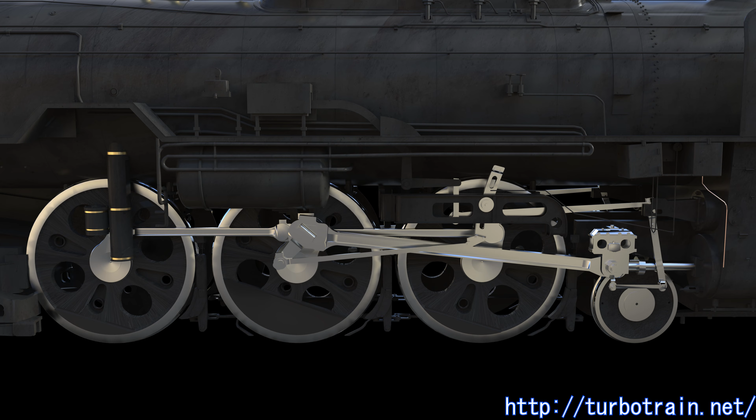The drive system of railway vehicles began with reciprocating steam engines, which could directly drive the wheels through steam pressure. For a long time, this was accompanied by some electric traction systems. Since these methods could drive the wheels directly, either from the power source or through a combination of gears, no transmission was necessary for adjusting speed or tractive effort.

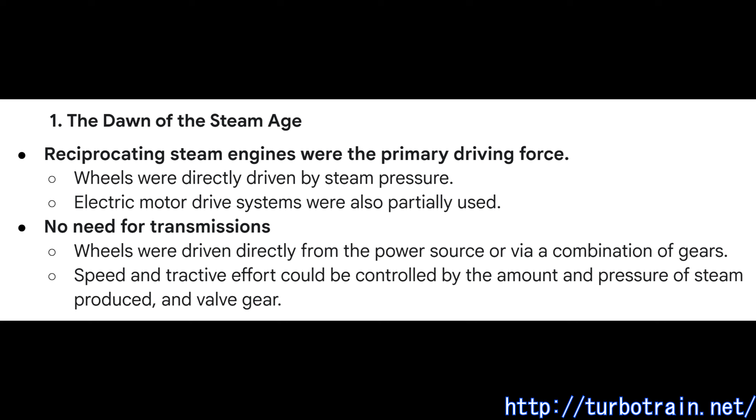However, there was growing demand to address the drawbacks of steam engines, which consumed vast amounts of fuel and water while producing large amounts of smoke. Electric traction did not have this problem, but supplying electricity was complicated.

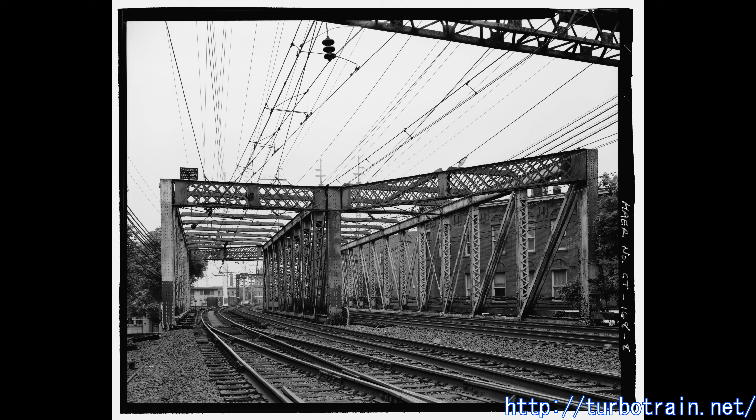This led to the introduction of internal combustion engines. Instead of supplying external steam to a cylinder to move the piston, fuel and air were ignited inside the cylinder, generating pressure to drive the piston.

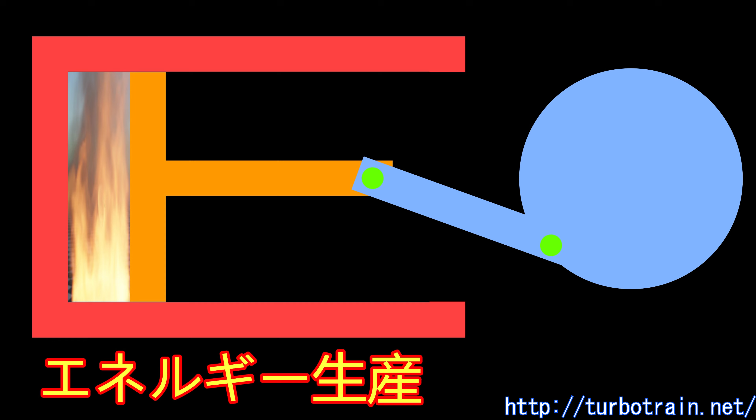Since large steam-generating equipment was no longer required, these engines could be made smaller and lighter, like electric motors, and they spread across land, sea, and air applications. Railways had high expectations for this engine technology, but there was a major problem.

In steam systems, the amount of fuel burned determines the quantity of steam produced, which is regulated by valve mechanisms to control pressure and flow to the cylinders.

At low engine speeds, steam pressure can be maximized, allowing pistons to exert maximum force. As engine speed increases, steam consumption rises, eventually exceeding the capacity of the steam generator, causing pressure to drop gradually. However, since the engine is running faster, the total work done remains the same.

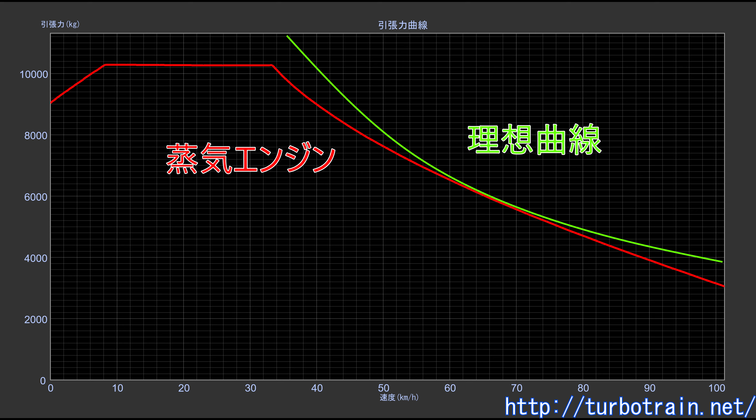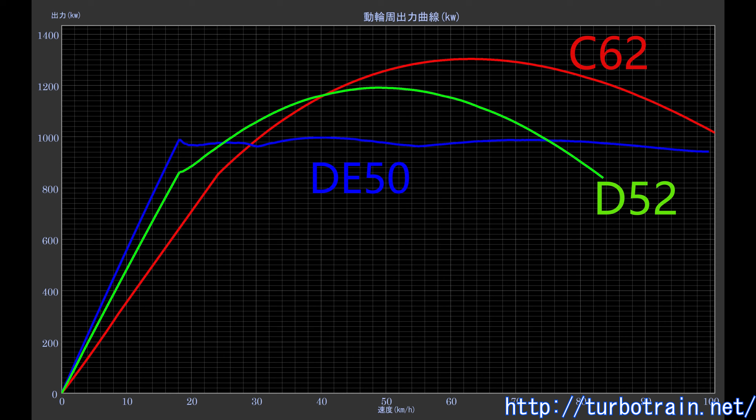Conversely, in reciprocating internal combustion engines, the maximum amount of air and fuel that can be processed inside the cylinder is fixed. The force exerted by each piston stroke is constant per explosion cycle.

Unlike steam engines, increasing fuel and air intake does not create a stronger explosion at lower speeds. Thus, an external system is required to vary torque with speed.

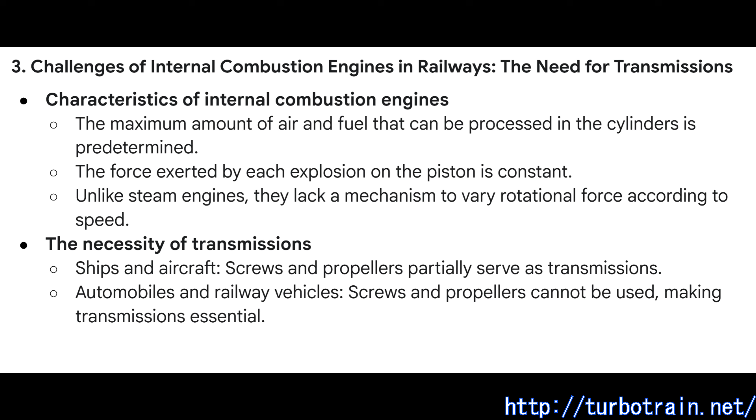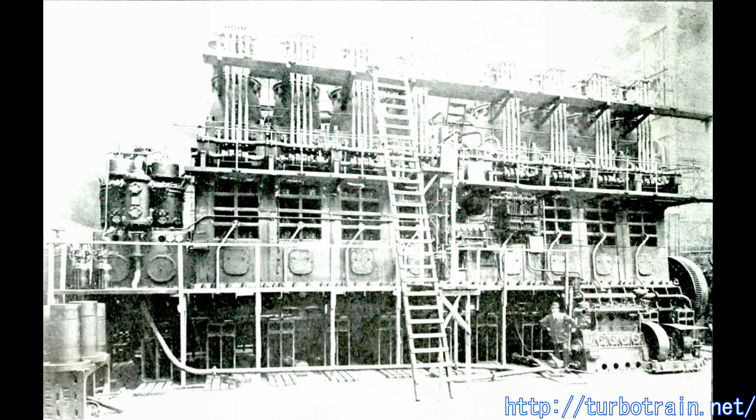In ships and aircraft, propellers or screws perform this function, albeit imperfectly. This enabled early adoption of large, high-output reciprocating engines in these applications.

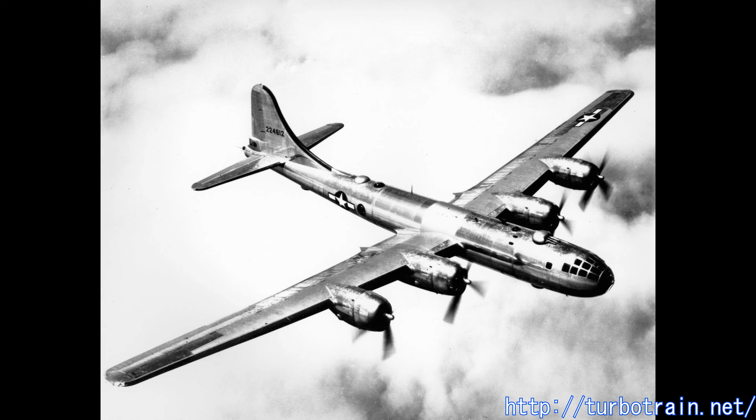However, automobiles and railway vehicles could not use propellers or screws. As explained in another video, they required transmissions to fulfill this role.

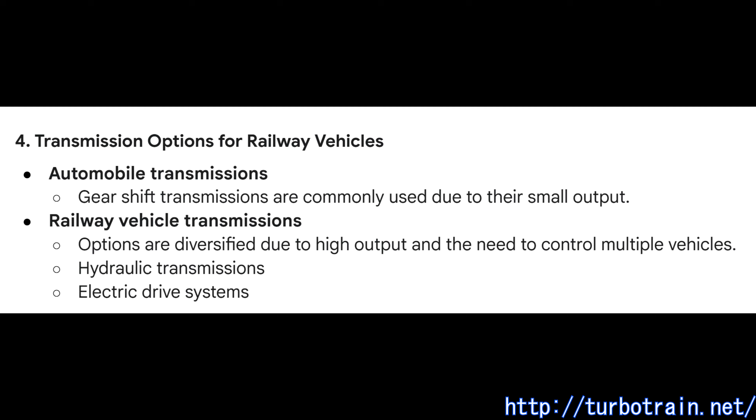Since automobiles have lower power output requirements, gear-shifting transmissions became widespread due to their simpler mechanical strength demands. For railway vehicles, due to their high output and the need to control multiple cars, hydraulic transmissions and electric power conversion systems became the dominant solutions.

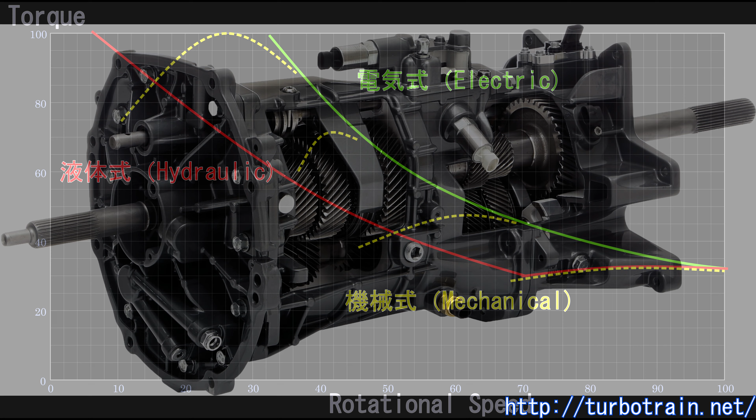Electric traction systems use an engine to drive a generator, which supplies electricity to motors that drive the wheels - a concept akin to an electric transmission. Essentially, it's like mounting an engine-driven generator onto an EMU or electric locomotive.

However, compared to conventional electric trains, this system was heavier, bulkier, and required additional complex components, leading to various challenges. Hydraulic transmission emerged as an alternative solution.

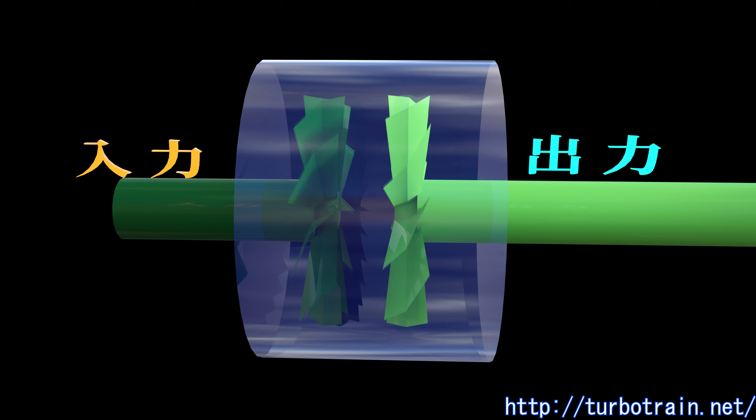It is similar to fluid-based power conversion in aircraft and ships, and hydraulic transmissions are smaller and lighter than DC generators at the time. Since they eliminated the need for traction motors, they were ultimately lighter than electric traction systems.

Additionally, the number of components was drastically reduced, significantly simplifying maintenance compared to electric systems that required complex electrical contacts, DC generators, and DC motors.

Since hydraulic transmissions were smaller, lighter, cheaper, and easier to maintain, they were expected to rapidly gain popularity. However, they suffered from efficiency issues. Performance dropped sharply outside specific speed ranges.

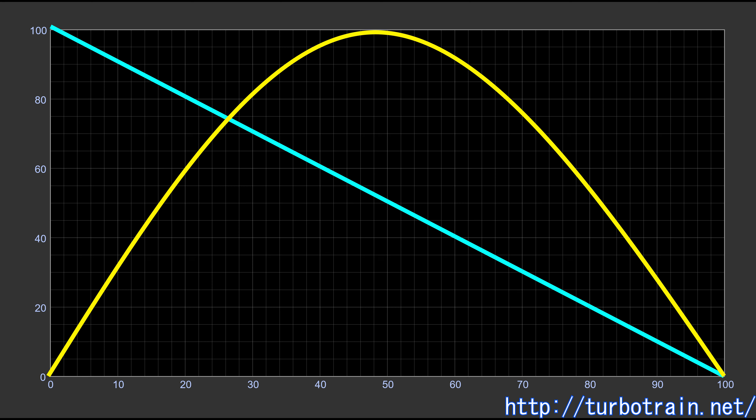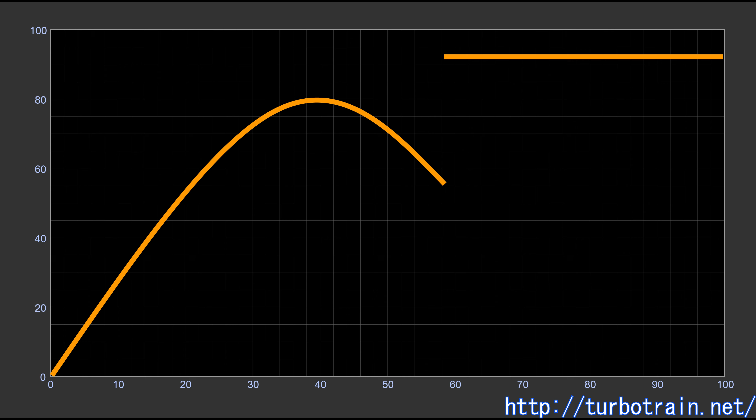This was in stark contrast to electric transmissions, which maintained high efficiency across a broad range of operating speeds. Although bypassing the hydraulic transmission to directly drive the wheels at higher speeds would be ideal, this was not feasible for large locomotives.

To achieve efficiency comparable to electric traction across both low and high speeds, a gear-based transmission had to be integrated. Integrating gear transmissions presented significant challenges.

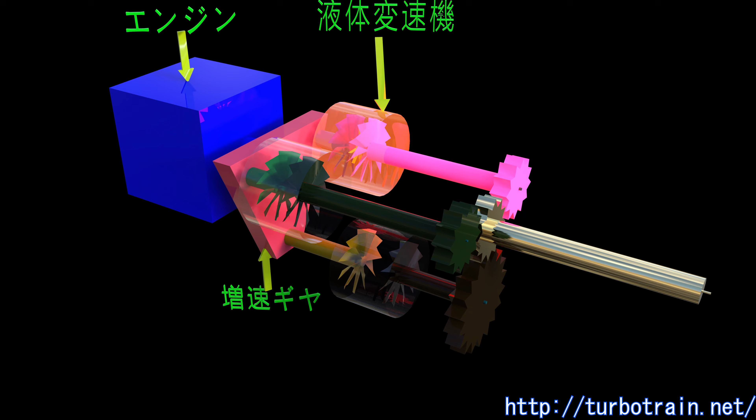The Mekidro system, which directly switched multiple gears, did not become widely adopted. Instead, Voith transmissions, which switched between hydraulic units with different gear ratios, became the standard. However, these were bulky and complex, diminishing their advantage over electric systems.

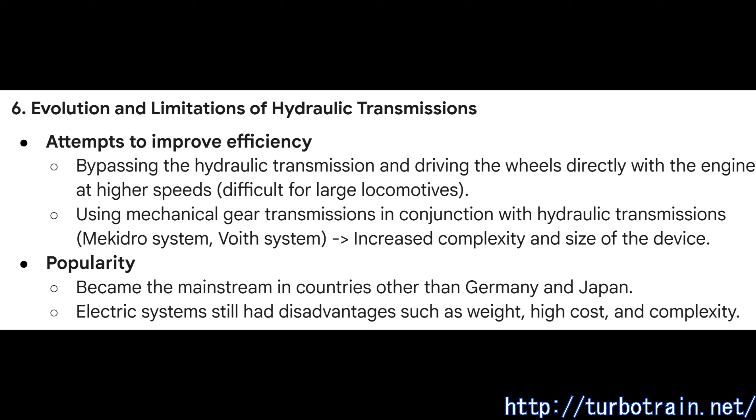Despite these drawbacks, electric traction remained heavy, expensive, and intricate, leaving hydraulic transmissions with strong support in locomotive applications, particularly outside Germany and Japan, where they became dominant.

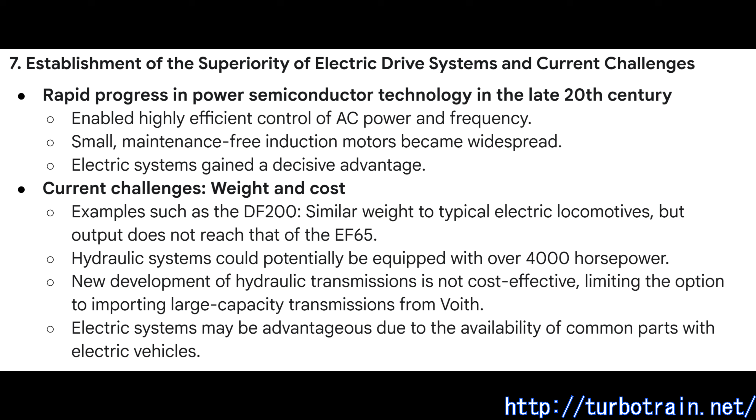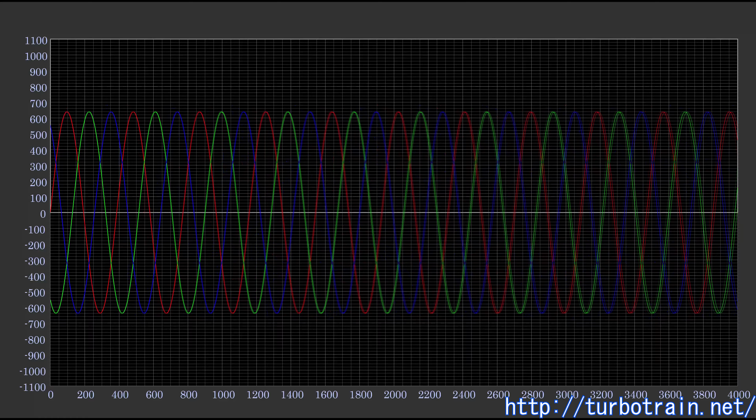This situation persisted for decades until the rapid advancement of power semiconductor technology at the end of the 20th century drastically improved the viability of electric traction. As explained in another video, the ability to efficiently control AC power and frequency allowed lightweight, low-maintenance induction motors to be widely adopted in railway vehicles.

Today, hydraulic systems have become entirely outdated, with even small vehicles such as DMUs being increasingly threatened by electric traction systems. Electric transmissions now appear to have secured an unshakable position. But let's shift perspectives. Does modern electric traction have any weaknesses?

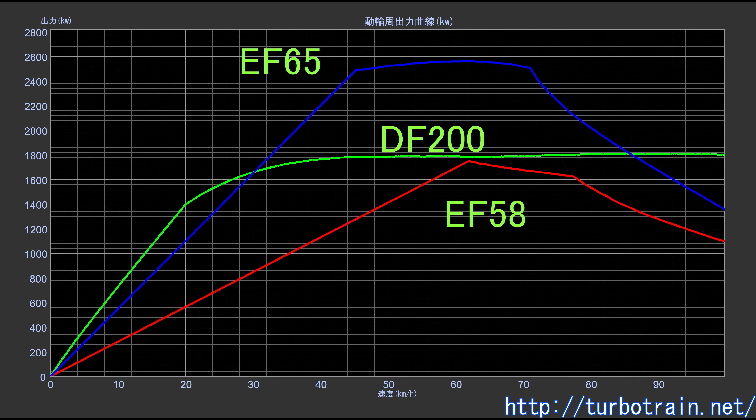The long-standing issue of weight, how has that changed over time? Looking at the DF200, it has 6 axles with an axle load of 16 tons, making it roughly the same weight as a typical electric locomotive. Its output at wheel rim surpasses the EF58 but falls short of the EF65.

Since it has to be compared with the new generation electric locomotives from the 1950s and 60s under JNR, its performance remains somewhat ambiguous. If this weight level is acceptable, a hydraulic-powered locomotive might be able to accommodate over 4,000 horsepower. Using the axle configuration of the DF51 presented in a previous video and a box-shaped body, it could incorporate 2 engines exceeding 2,000 horsepower each. Even though hydraulic traction is slightly less efficient, its output at wheel rim would exceed that of the DF200.

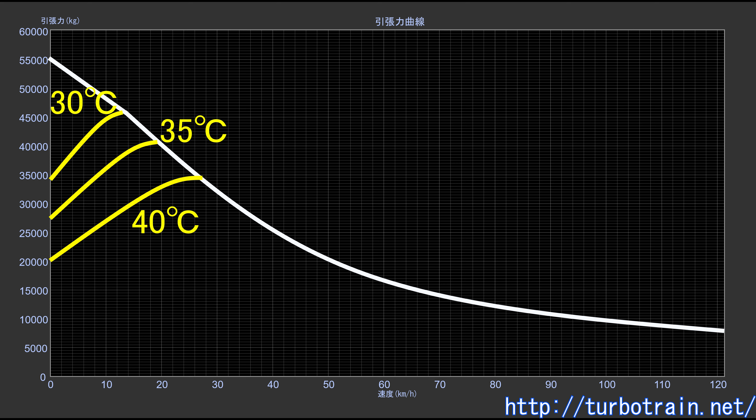How does it compare in terms of cost? In Japan, the development of 2,000 horsepower class hydraulic transmissions halted with the cancellation of the DE50, and creating a new hydraulic transmission system would be economically unfeasible. Voith has products up to the 4,000 horsepower class, meaning importing from them would be the only option. This suggests that electric traction might have an advantage due to the availability of domestically produced components shared with electric vehicles.

What about DMUs? Currently, high-speed DMUs operate under JR companies, and 900 horsepower engines have become standard. However, their weight is far heavier than older JNR-era DMUs, with some nearing 50 tons in self-weight as a common occurrence. It is truly the era of heavy DMUs.

If these power levels were applied to conventional electric traction systems, even with today's technology, keeping them within this weight limit would be difficult. Like JR Hokkaido's Kiha 285, they would have to rely on a parallel system that replaces the hydraulic transmission with an electric motor.

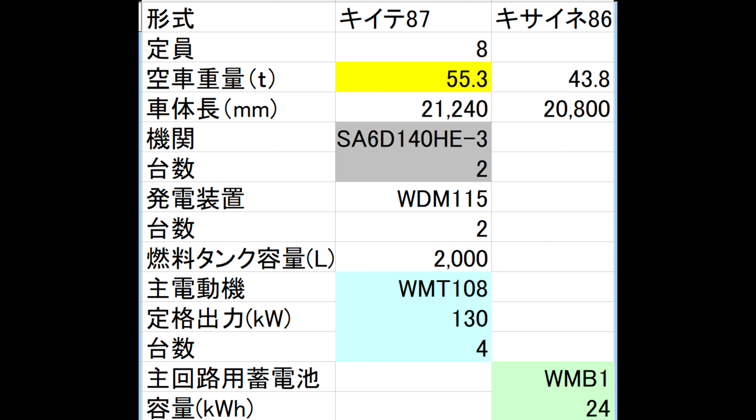The Kiite 87 was introduced with equivalent output using an electric traction system. Though it differs significantly in design, its weight reaches 55 tons, and even with small capacity batteries, they had to be mounted in a trailer car. Although it utilizes SCIB batteries, which enable safe, long lifespan, and rapid charge-discharge cycles, its weight is close to that of lead-acid batteries, a tough challenge. The prospect of series-type electric high-speed DMUs thriving on regional lines still seems distant.

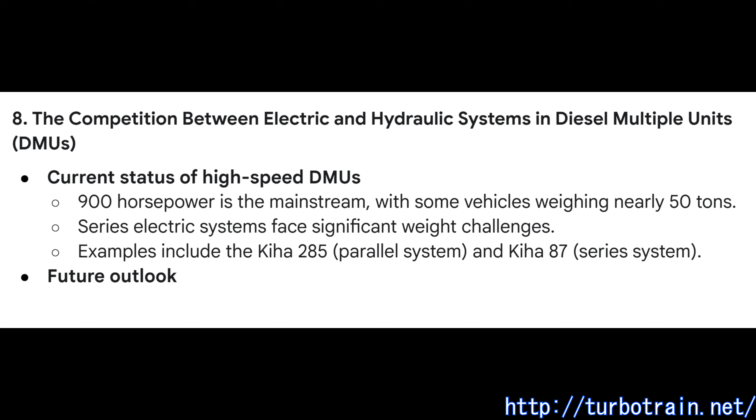Another major concern is the effect of multiple energy conversions. Mechanically, the simplest and most efficient system is direct engine-to-gear transmission, where the engine drives a gear, which drives another gear, ultimately turning the wheels. With electric traction, the process is more convoluted. The engine drives a generator, which converts energy into electricity, which powers an electric motor, which drives a gear, which in turn drives another gear that moves the wheels.

Compared to mechanical transmission, where kinetic energy is directly transferred to the wheels, electric traction requires 2 energy conversions: kinetic energy to electrical energy, then back to kinetic energy. Since these conversions happen in sequence, the overall efficiency of the system is the product of each individual conversion efficiency.

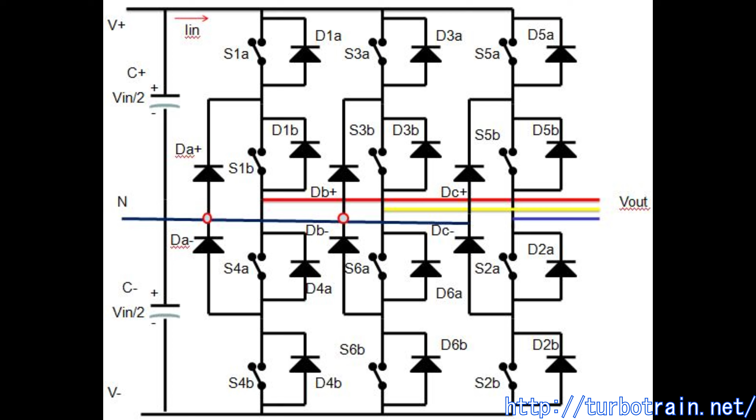An additional complication arises from the need for precise AC frequency control. Since AC power is generated, it must first be converted into DC before being transformed back into AC, introducing an extra conversion stage between the generator and traction motor. Older DC electric locomotives lacked this intermediate conversion, and despite the relatively inefficient 90% performance of DC generators and motors at the time, they still demonstrated surprisingly good efficiency.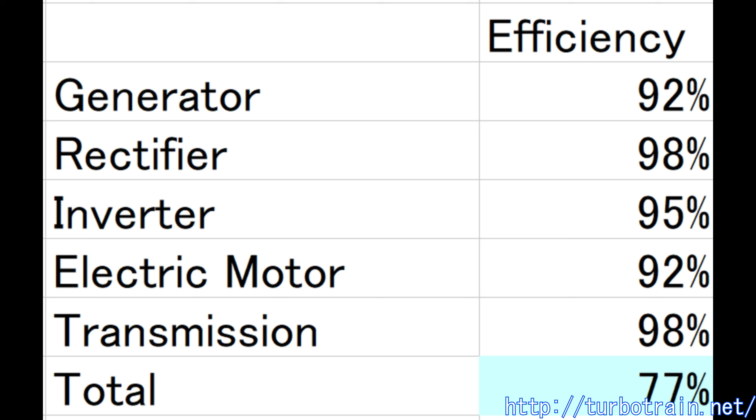How does efficiency compare when using modern standard power control semiconductors such as IGBT and silicon rectifiers, along with induction motors? For example, suppose a locomotive has the following efficiencies: Generator, 92%. Rectifier, 98%. Inverter, 95%. Motor, 92%. Gear transmission, 98%. The total efficiency of this locomotive would be approximately 77%, comparable to hydraulic transmissions.

Efforts to overcome this issue include the development of switching devices using silicon carbide or gallium nitride, as well as utilizing permanent magnet synchronous motors and generators.

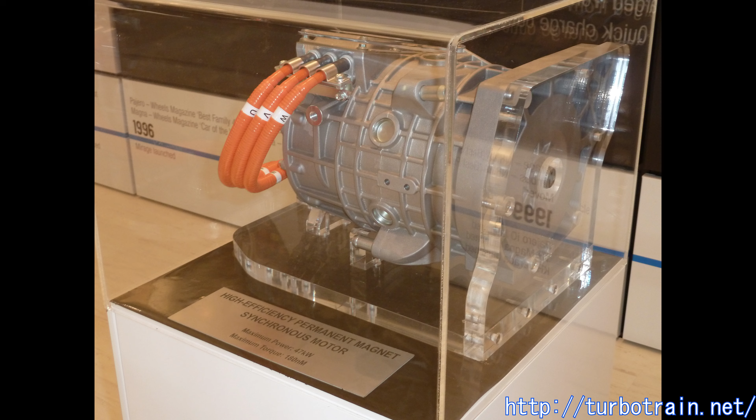Even if generator and motor efficiency is improved to 95% and inverter efficiency reaches 97%, total efficiency would still be 84%, surpassing hydraulic transmissions but falling short of direct drive traction.

This improvement allows electric transmissions to exceed hydraulic systems in efficiency, but such components remain expensive and impractical for large-scale applications.

However, AC frequency control has enabled the use of high-speed AC traction motors, significantly reducing motor size compared to the DC electric era. Yet, generators remain restricted by the rotational speed of diesel engines, continuing to operate at relatively low RPM.

Compared to mid-speed diesels around 1000 RPM, which were common in the DF50 era, modern high-speed diesels, widely used in locomotives, can operate at double the speed, benefiting from both the elimination of brushes and commutators and the advantages of high-speed rotation.

Looking from another perspective, if current technology were used to build a high-speed diesel-driven DC generator and DC traction motor-based electric locomotive, the differences in efficiency and power-to-weight ratio might be surprisingly minimal.

Nevertheless, AC frequency control has a major advantage: it creates almost contactless electrical circuits, making maintenance much simpler.

Additionally, precise frequency regulation allows fine-tuned control of AC motor rotation, significantly reducing wheel slip. Even if slip occurs, the system naturally stabilizes, greatly improving adhesion performance.

These two advantages are crucial in railway applications. Even though AC electric transmissions require multiple energy conversions and exhibit lower than ideal efficiency, their advantages ensure their dominance.

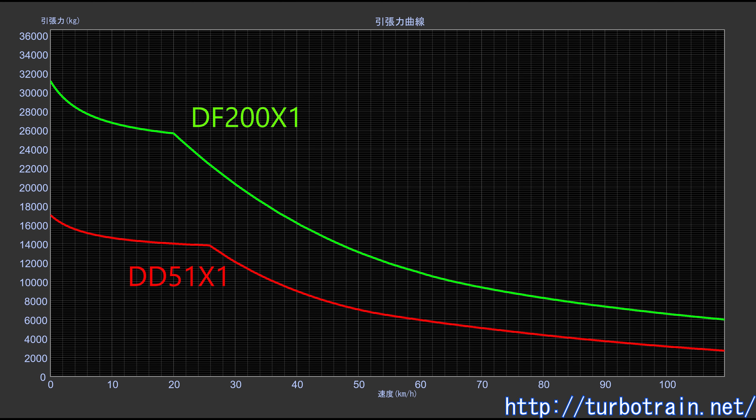Furthermore, advances in energy storage technology have enabled regenerative braking in internal combustion-powered rail vehicles, further enhancing the appeal of electric transmissions.

However, durability, weight, and cost concerns still limit the practical use of onboard energy storage systems in railway applications, keeping their implementation at a trial stage for now. In the long term, though, this technology holds potential.

In automotive applications, where required output is lower and product lifespans are shorter, regenerative power systems have established a firm foothold. Interestingly, the electric transmission systems adopted in automobiles differ greatly from those used in rail transport.

As the efficiency of electric transmissions improves, it becomes more appealing to transfer all traction power through a simple structure using electric transmissions, as seen in locomotives.

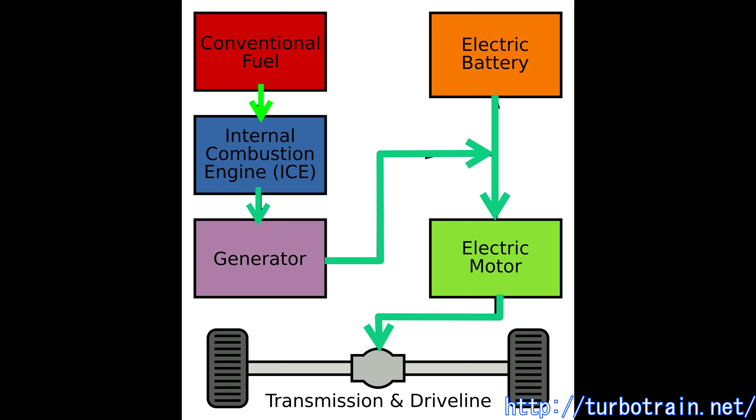However, since electric transmissions still fall short of mechanical systems in maximum efficiency, direct drive engine operation remains more fuel efficient outside partial load scenarios, where traction motors excel.

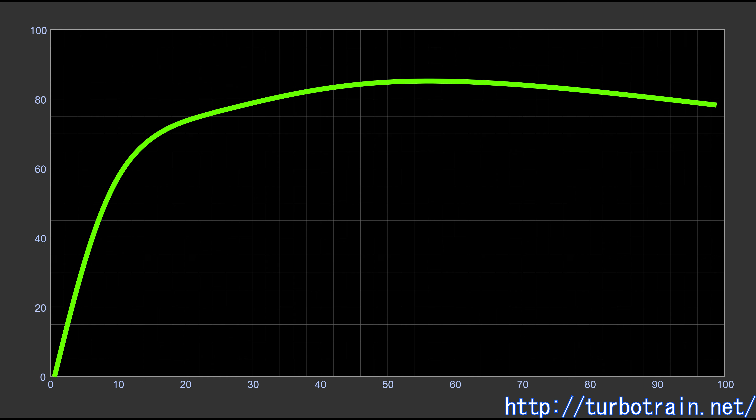This characteristic has contributed to the negative reception of Nissan's electric gasoline-powered vehicles in countries with extensive high-speed driving.

To mitigate this issue, direct drive systems must be incorporated alongside electric transmissions, despite their mechanical complexity.

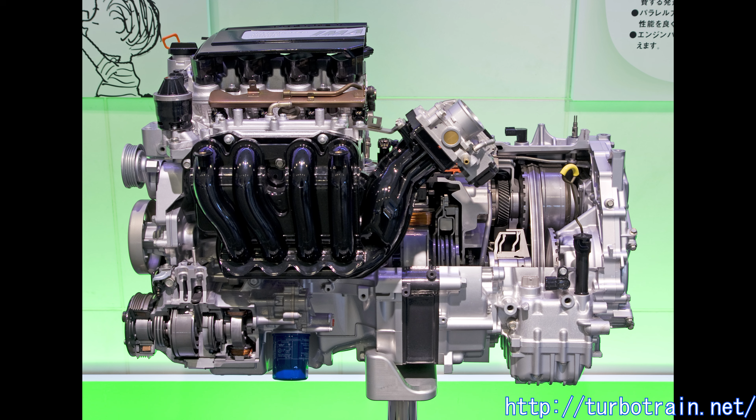Automobiles require higher acceleration at lower speeds than railway vehicles, and electric motor-driven systems without a transmission tend to favor low-speed optimization. Even though modern electric motors maintain high efficiency across wide speed ranges, they still suffer efficiency drops at high speeds.

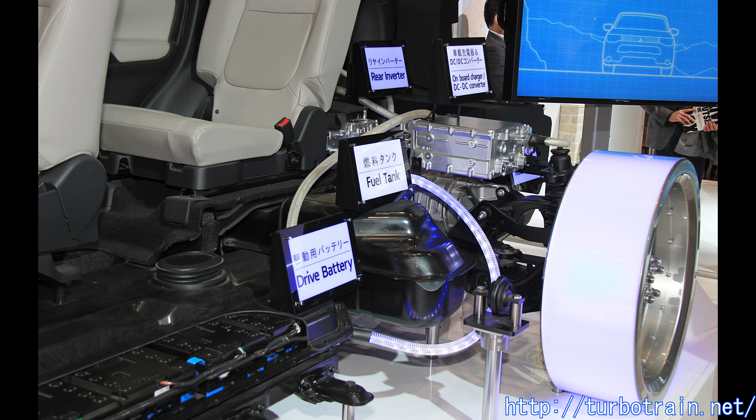Since automobiles have lower power output requirements, they can integrate direct drive systems, ensuring engine-based traction at high speeds where electric motor efficiency decreases.

This industry has been dominated by planetary gear-based systems, which intelligently distribute engine torque between power generation and direct traction, ensuring optimal efficiency across various loads.

Railway applications also show similar trends. For instance, JR Hokkaido adopted Hitachi's system, replacing hydraulic transmissions with electric motors, and developing electric-powered railcars with 4-stage direct-drive transmissions after initial startup.

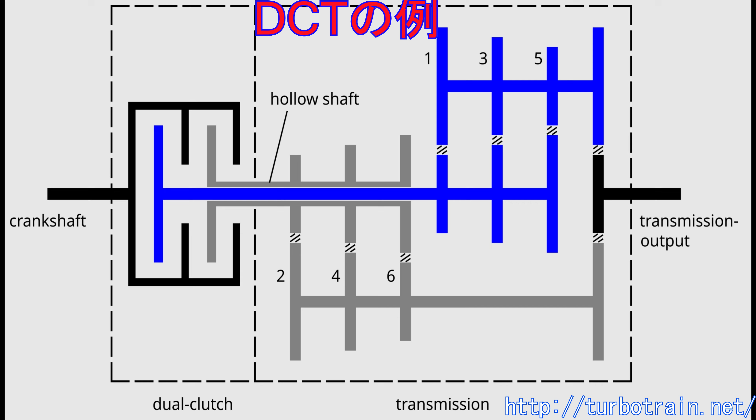Electric transmissions have the advantage of component and maintenance standardization with electric trains, making them particularly suitable for railways that primarily use electric trains but require a few DMUs.

However, in financially constrained operations like JR Shikoku, adoption has been less aggressive. Although electric-powered railcars have been introduced to replace older local diesel units, their 450 horsepower engines result in over 40-ton weights, a considerable mass.

For high-speed DMU applications, this performance remains insufficient, while for local routes, they are too expensive and heavy to be cost-effective, leading to challenges in their widespread use.

Looking at the aviation sector, despite being gas turbine-driven, there is increasing interest in electrically assisted propulsion for fuel efficiency, even for mid-sized passenger aircraft.

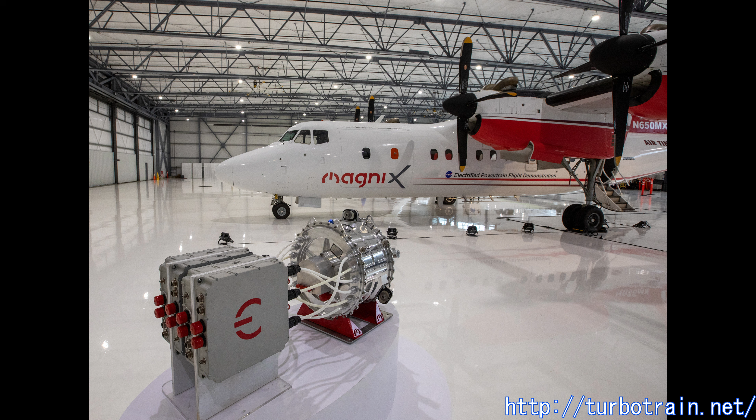Weight reduction remains the top priority, and although the market size is smaller than automobiles, significant efforts have been made to develop ultralight, high-efficiency electric motors and control devices.

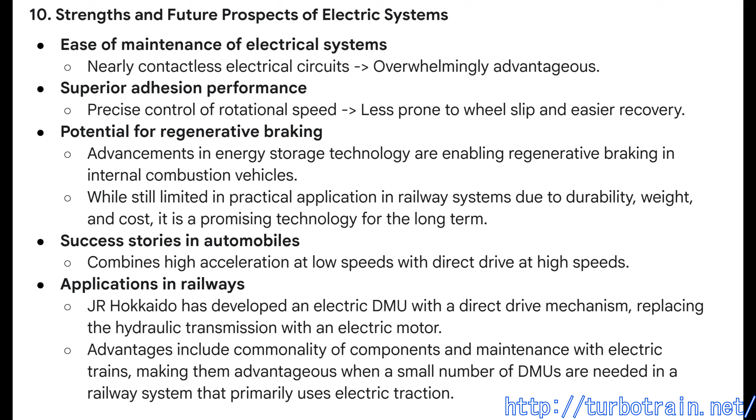If mass production and cost reduction can be achieved, this technology could also support the expansion of electric transmissions in railway applications. Though many challenges remain, electric transmissions are evaluated differently based on specific priorities, making future developments particularly intriguing.